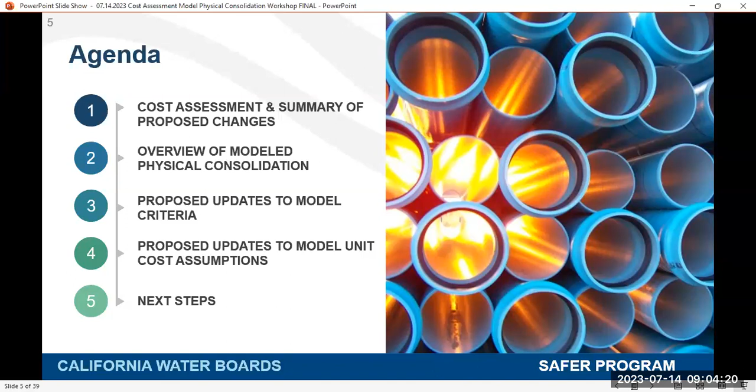So my name is Kristen Appold. I am the senior for our needs analysis unit within the Division of Drinking Water. I'm going to be providing the cost assessment background information for you today, and then I'm going to turn things over to Moj on our team, who's going to really dig in on the physical consolidation analysis and the changes we're looking to implement.

But before we get started, we always like to start our webinars with a quick poll question to get a sense of... let me restart the poll, relaunch poll, see, there we go. We like to get a sense of who's with us today, how familiar you are with the topic we're discussing. We're going to be covering a component of our cost assessment model, which is embedded in our broader needs assessment work that we do every year.

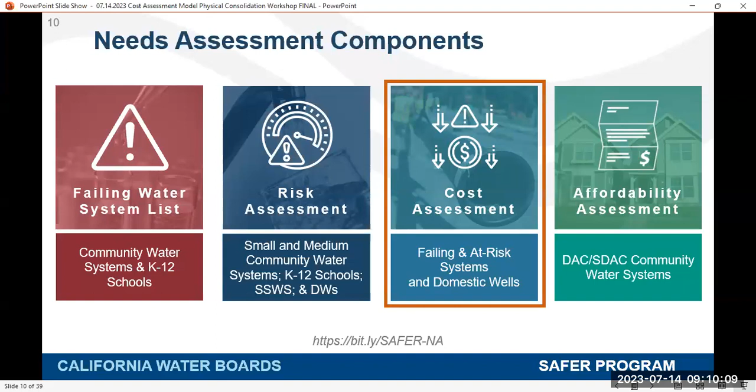Today we're really focused on our cost assessment work and the underlying assumptions within that model. Senate Bill 200 directs the Water Board to estimate our anticipated funding needs related to implementing interim emergency measures and long-term solutions. It's supposed to inform how we prioritize our SAFER funding, give us a sense of how much funding is needed compared to how much we have available so we can make smart decisions around how that money is spent, and communicate to others the extent of the challenges we're facing across the state.

I want to emphasize, and you'll hear us repeat this, the cost assessment model, the analysis done, and the cost numbers that come out of it are not intended to inform local decisions. This is not an options analysis, and it's not used in any way when we work with communities to inform local decision making. Because this is a model, we're doing a big cost estimate using available data that is very limited, so we have a lot of embedded assumptions and estimates in the model, which should not be used to base local decisions. We do not use it at the local level for any decision making or work with water systems.

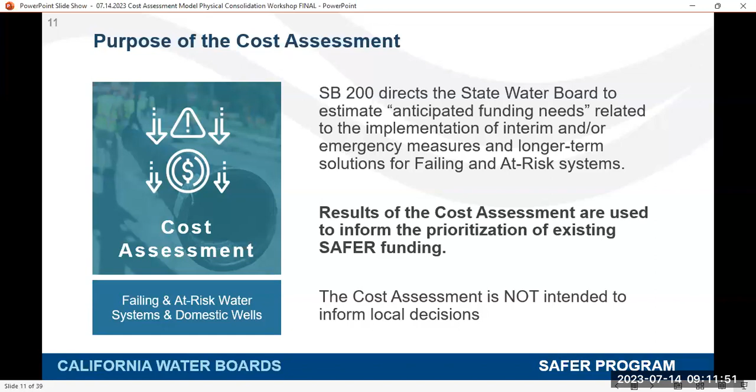Okay, so who's included in the cost assessment? I covered this a little bit earlier, but it's worth highlighting. So we are looking at trying to identify modeled interim and long-term solutions for failing water systems.

You'll see here we assess failing water systems for a number of different criteria, highlighted in the green text. When we first did our model in 2021, the very first iteration of it, the criteria for failing was smaller than what it is today. So there's a lot of discrepancies between our inventory of systems that we used back in 2021 versus where we're headed in the future.

So our new failing list of public water systems includes failing systems for E. coli violations, treatment technique violations, and repeated monitoring reporting violations. These are things that we need to accommodate in the newly designed model.

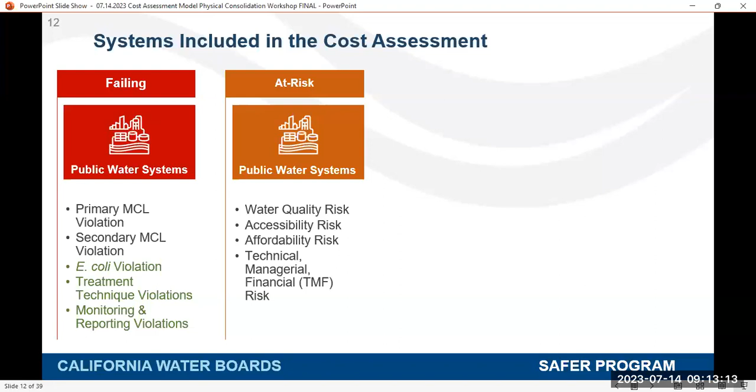Our at-risk public water systems are included in our analysis, and we identify at-risk systems in our risk assessment, looking at water quality risk, accessibility risk, affordability, and technical managerial financial capacity risk. If you're interested in learning more about how we identify our at-risk public water systems, please go to our webpage. We have lots of documentation, webinars, PowerPoints on how we got there. It's a process that evolves over time as data becomes available.

We then identify at-risk state small water systems and domestic wells. Again, there's been quite a bit of change in how we identify our at-risk state smalls and domestic wells from the first iteration of our cost assessment model, done back in 2021. At that time, our at-risk systems were only looking at water quality risk, and that was it.

And actually what I've noticed here is we're missing our whole new category. We've added in the past 2 years both drought risk and socioeconomic risk. So our at-risk state smalls and domestic wells, that inventory of systems we're looking at, has changed quite a bit from what we had in 2021 to where we are now. Because we've added additional risk categories like drought and socioeconomic risk to help us really identify that more narrow list of communities that may be at risk, we've got a smaller subset of systems within this category.

You'll see that throughout the slides as we look at a comparison between the 2021 model and what we're recommending here.

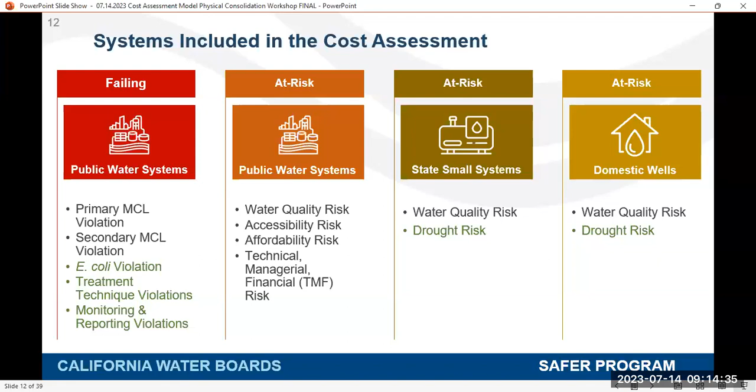So let's talk about the proposed changes to the entire model. We have been hosting lots of workshops on this. If you're not as familiar with this work and you want to understand the history and how things have evolved over time, please take a look at our webpage. Again, lots of documentation there with white papers, webinars, PowerPoints on how the cost model has evolved.

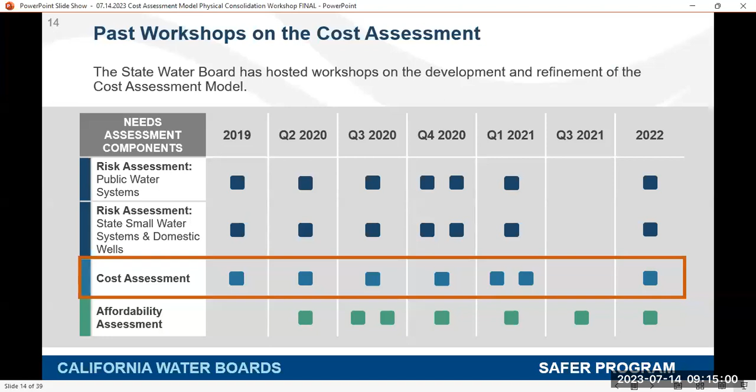And if you're not familiar with the webpage, we're providing the hyperlinks. So let's talk about how the old model used to function, because we are proposing to streamline it to make it a little bit simpler and easier to follow and to operate.

So the 2021 cost model, which again was developed back in 2019 and 2020 with our colleagues over at UCLA and Corona Environmental and a bunch of other subcontractors. The first step of the old model was to look at many types of long-term solutions all at the same time. So we would model everything out, different options, in the first step.

And then we would conduct a sustainability and resiliency assessment that was looking at a few resiliency metrics and cost numbers, to compare the top 2 modeled solutions. And then we would select the best solution, taking into consideration that scoring and the cost estimate number.

Unfortunately, with this model, it was a good first step. However, we saw in the results that it tended to over-select point of entry, point of use devices over treatment for failing systems, especially where we think the agency would not really want to do that in the long run. So we wanted to rejigger the model to make sure that the results better aligned with the priorities of the SAFER program and at the State Water Board, and with reality and where we were seeing our SAFER projects and funding being allocated over the last few years.

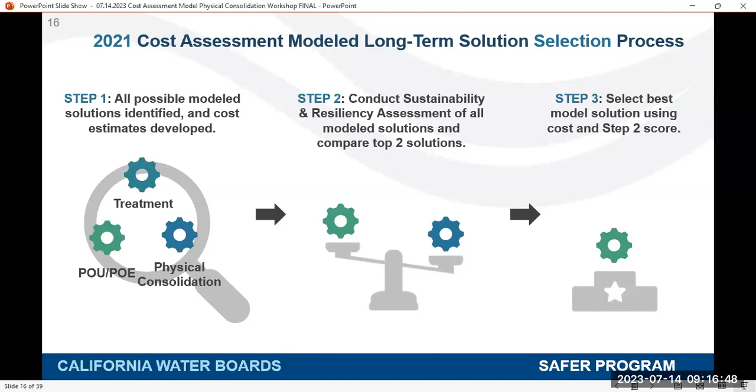So we wanted to rethink the model, and this was our proposed new process that we put out last year in a public workshop for feedback. And this is the newer process with a slight change.

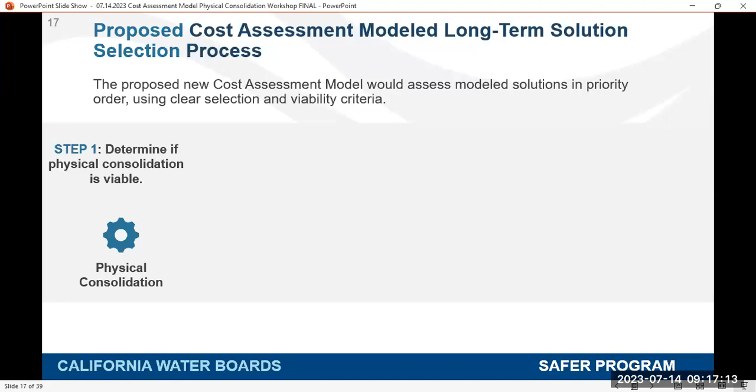So step 1 is to actually look at physical consolidation as the first step in the model. This aligns a lot more closely with the program priorities and the State Water Board priorities around failing and at-risk water systems. If physical consolidation is not a viable solution within the model, we'll then look at whether or not treatment may be viable for our systems that are failing for water quality issues.

If treatment may not be an option, or if the size of that system indicates centralized treatment may not be a solution, the model will then look at point of use, point of entry. But in those cases there may be some systems where that's not viable, and we circle back to identify small scale treatment with O&M assistance for really small systems. We used to have bottled water or hauled water in here from last year, but we don't see that as a viable long-term solution, so that's been modified.

We'll be going over the last three steps in future webinars. Today we're really focused on how the model looks at physical consolidation.

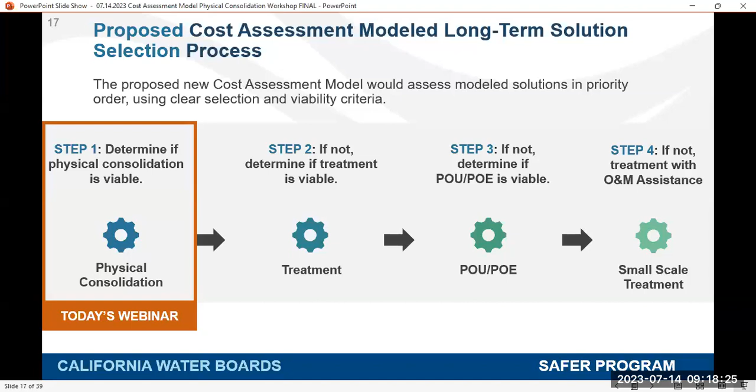But we wanted to get your quick feedback on what the changes are that we're recommending for the big picture model's process. Let us know what you think.

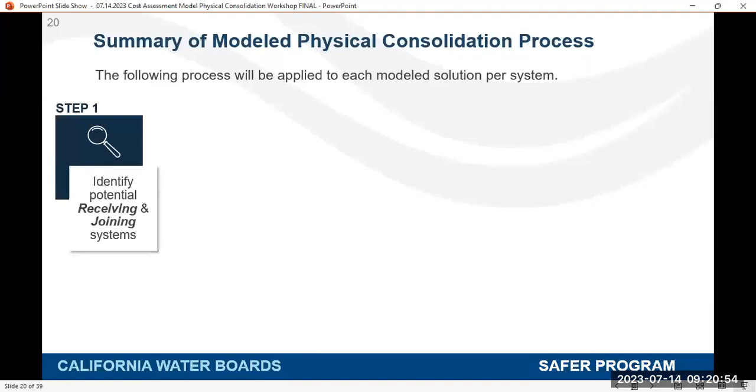In step number 1, we try to identify our potential list of joining and receiving systems. If any of the systems don't meet the criteria we're recommending, then physical consolidation is not considered viable, and we look for alternative long-term solutions.

For the systems that meet the criteria, we take them to the GIS analysis, where we apply distance criteria. Then again, for any systems that don't meet the distance criteria, physical consolidation is not considered viable, and we seek alternative long-term solutions.

For the systems that meet the distance criteria, we export our GIS analysis spreadsheet and start applying all cost assumptions, equations, and multipliers to come up with the capital cost for each consolidation project.

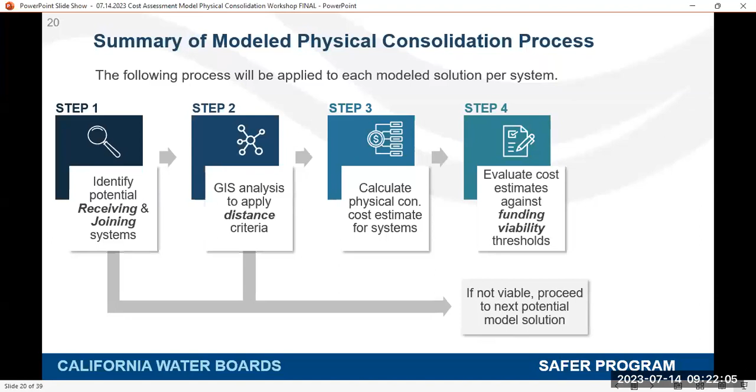From there, we take each physical consolidation capital cost and evaluate the funding viability threshold by comparing it against our recommended model funding viabilities. If the project cost for the consolidation exceeds the viability, then physical consolidation is again not considered viable, and we seek alternative long-term solutions.

For the projects that meet the funding viability thresholds, we go to step number 5. There, for any system that meets both the distance criteria and the funding viability threshold, we cost out additional infrastructure needs. For example, if our receiving system is failing for water quality, we cost out additional treatment. If the receiving system has a sole source of water supply, we look at costing out a new source, and we add other essential infrastructure costs to increase the system's sustainability. All of that happens in step number 5.

Before I dive into the details of each step, I'd like to emphasize that through our internal work group, consisting of our Division of Drinking Water and our Division of Financial Assistance, we tried different physical consolidation options using different system size criteria and funding viability thresholds for both joining and receiving systems. Any number you see on the coming slides is based on our recommendations, but if you have questions about how we developed or reached these conclusions, I encourage you to visit our appendix.

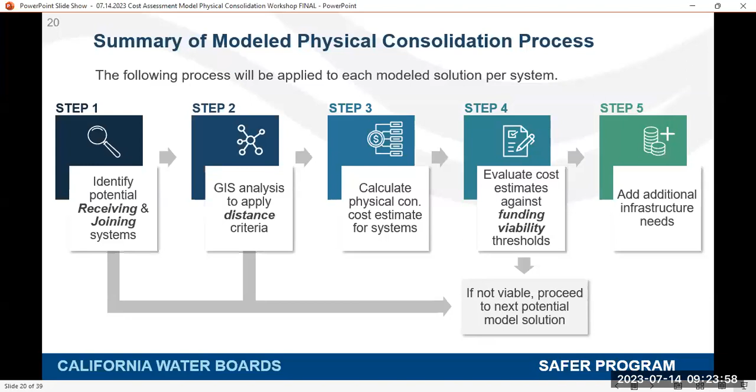So next slide, please. Okay, so first and foremost, we would like to identify who's receiving and who's joining systems. But before we do that, I would like to briefly define what's a receiving and what's a joining system.

So basically, a receiving system, if you want to think about it, is our large community water system that subsumes and expands to provide water supply not only to their customers, but to the joining customers as well.

Joining systems, though, are usually smaller public water systems, state smalls, domestic wells, that dissolve within the boundaries of the receiving system. So they no longer exist, and they start receiving water from the receiving systems.

Next slide, please. Okay, so now we've defined who's joining and who's receiving. I would like to walk you through our criteria for the selection.

The old criteria excluded completely any failing or at-risk public water system from being a potential receiving system, and only looked at non-failing or non-at-risk systems with a population greater than 3,300 as a potential receiving system.

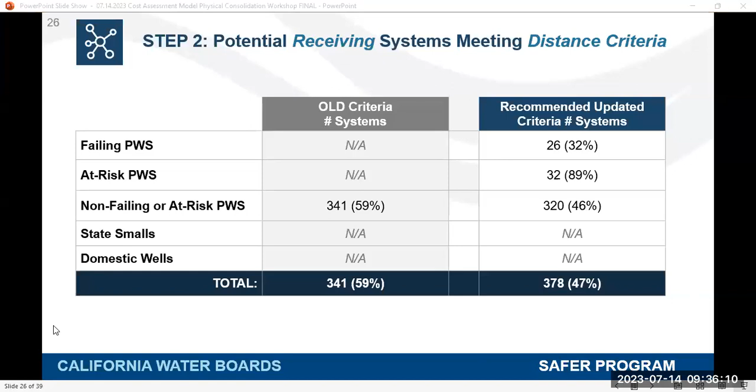Next slide, please. So for joining systems, our recommended criteria includes more failing and at-risk public water systems. We have 173 potential joining systems compared to 138, and we have 250 at-risk public water systems compared to 193—roughly 100 systems more following our recommended updated criteria.

State small and domestic well counts again are low, and I keep emphasizing this because we are utilizing a different inventory. The old criteria relies on wells and state smalls that are at risk of water quality, while the state smalls and domestic wells we utilize for the recommended updates are based on the combined criteria. So this will bring our counts lower.

So in total, we're looking at 26,175 potential joining systems compared to 35,619 potential joining systems following the old criteria.

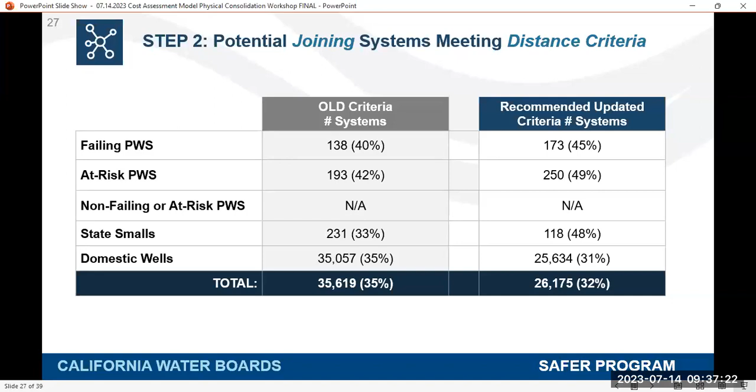So now we identified the receiving and joining systems that meet the distance criteria. We would export these to Excel, and we start conducting all the cost assumptions and cost equations in there. The State Water Board actually conducted rigorous research.

We did a lot of back and forth, and we tried to collect the most up-to-date prices by contacting consultants, vendors, engineering firms, also auditing and reviewing State Water Board funded projects, and outreaching to small and medium-sized water systems. If you have any information or want to see how we came to the conclusion of each cost estimate, I would really encourage you to visit Appendix B in the white paper.

Thanks, Moj. I just want to respond to a question coming from the inbox. Someone says they don't quite understand what we mean by state smalls and domestic wells as potential joining systems. These are communities served by state smalls and domestic wells that are designated as at risk right now in our risk assessment, and they are potentially joining in that they're at risk.

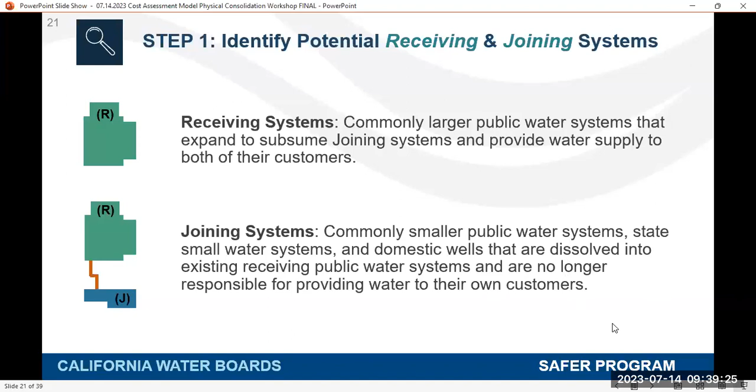So we would want to see if we could join them with another community water system. For example, if a domestic well was joined to a potential community water system, it would mean they're no longer relying on their domestic well for water. They would have a pipe connecting them to a community water system, centralized treatment, and they'd get their water that way. This is all hypothetical since it's a model. But that's what we mean by domestic wells and state smalls that would be joining systems. If that didn't quite answer your question, please feel free to raise your hand or provide another question.

And then, what is the maximum population served by a state small? I don't have the population number off the top of my head, but I know it's 15 service connections or less, so very small. Again, state small water systems are not regulated by the State Water Board—they are regulated by counties.

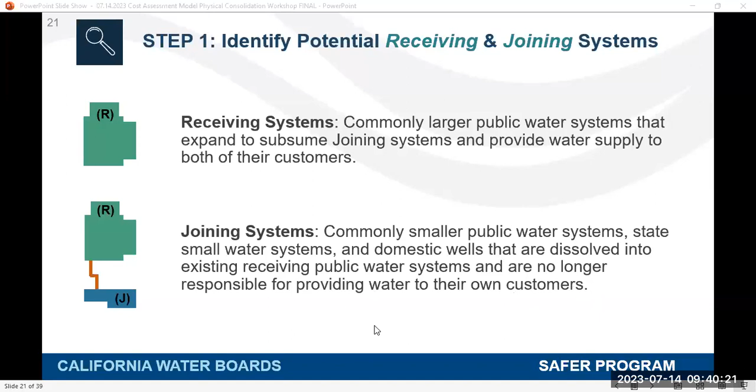Yes, sorry, thanks. I just had a couple questions about step 1 and step 2, I guess, for domestic wells and state smalls. One is, just seeing that the number of potential joining systems and systems included has decreased a lot for domestic wells and state smalls, and it seems like a lot of that's due to the reliance on this combined risk criteria. From our understanding of the needs assessment, that combined risk criteria is set up so that even if you're at high risk for water quality, you might not have combined risk. So you could have really bad water quality, but you still wouldn't be included in the cost assessment—or I mean, you wouldn't know it was really bad, but you'd be at high risk. I'm wondering, I guess we can look at the details in the white paper, but what was the thought process behind relying more on the combined risk than looking at either water quality or drought risk separately?

So it's a good point. For us, it aligns more with the direction and public feedback we received on how we conduct risk assessment for state smalls and domestic wells. There was feedback from both our advisory group and the public that we try to identify at-risk state smalls and domestic wells using a similar method, or at least similar data point categories, as we do for public water systems. That's why we added drought risk and socioeconomic risk. That gives us a smaller at-risk pool, but they are, in our mind, the top high priority at-risk communities. Because for water quality risk, we don't have an essential failing list equivalent for state smalls and domestic wells, since we don't have good data sets for that, we want to be a little conservative around how we incorporate at-risk state smalls and domestic wells into the model. The numbers aren't too far off, except for state smalls for sure. But that aligns with how we've evolved our at-risk methodology for state smalls and domestic wells. Hopefully that makes sense, Eric.

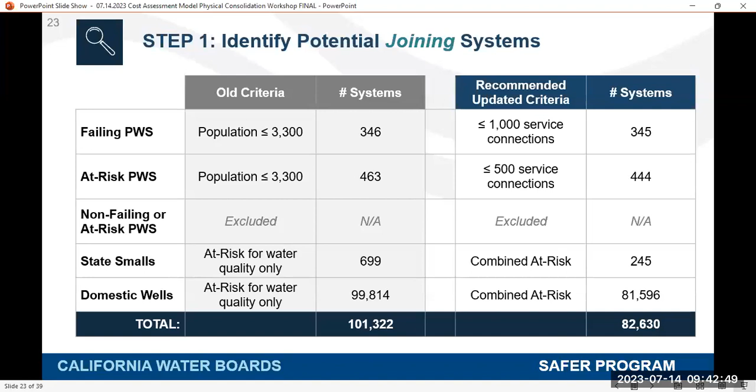I had one other quick question on step 2, just to understand how the recommended updated criteria for distance works for domestic wells. It sounds like if the route intersects, so if it's along a modeled route, then it would be picked up. And the quarter mile for maximum route distance, is that regardless of whether there's going to be a consolidation between two public water systems? Correct. Any at-risk domestic well within a quarter mile of a potential receiving system would then be included based on that quarter mile distance? Yes, and that is new to the model. That was not included in the first one.

Okay, great, thank you. Yeah, and we lowered the distance criteria just a little bit from what it was in the first model, based on observations of consolidations and pickups we'd seen through existing consolidation efforts. We thought it was best to lower it a little bit to align with the reality we're seeing. Okay, thanks a lot. Yep.

All right, one last question from Susan: what problem or gap with the old model is the new model focused on addressing or solving?

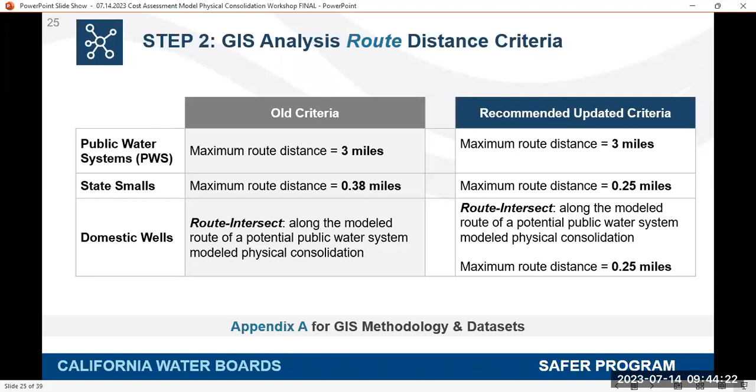So Susan, the old model had pretty strict criteria around physical consolidation. In reality, for example, let's go back to potential receiving and joining systems -- the old model was saying that failing systems and at-risk systems could not be receiving systems. But in reality, with physical consolidation projects that the State Water Board is actually funding, we are funding projects where an at-risk or failing water system can be a receiving system, and we fund not only the consolidation of nearby systems but treatment and long-term infrastructure to bring that system back into compliance. So we felt this criteria was too restrictive and didn't match reality, and we wanted to expand it to align with the direction the water board had taken.

For us, it was really about making sure the model reflected current projects and funding practices around physical consolidation. We also wanted to make sure the cost numbers, which we're about to go into, were updated to reflect the cost increases we've been seeing across the state, inflation, et cetera. So it's about developing a more robust, more accurate cost estimate so we can make better decisions around our funding. Hopefully that helps answer some of your questions, Susan.

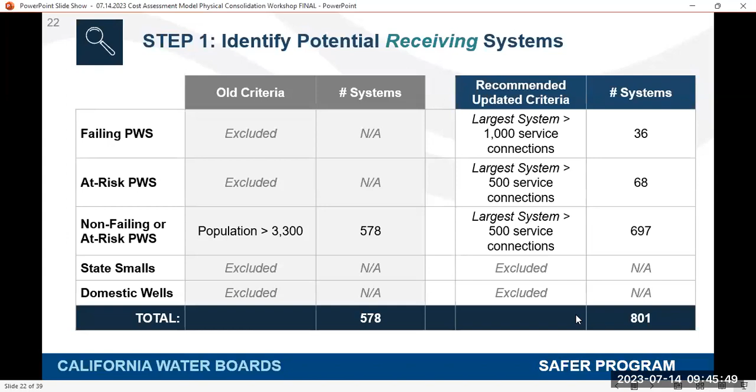All right, I don't see any other hands up or questions. Let's get into step 3.

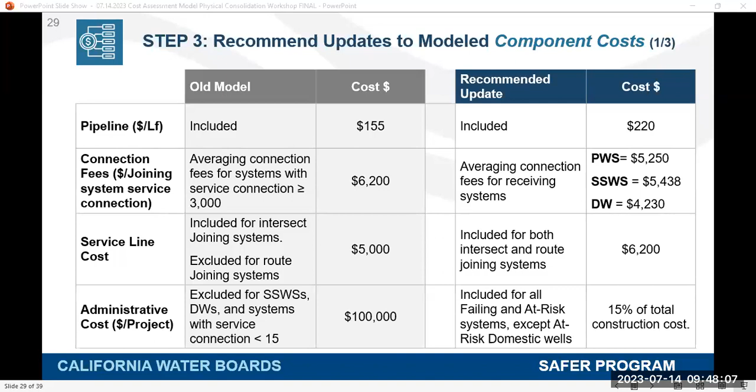CEQA cost, similar to the admin cost in the old model, was excluded for any system less than 15 connections, state smalls, or domestic wells, and it was a lump sum value of 85,000.

Based on our outreach, we recommend adding the CEQA costs to all failing and at-risk public water systems, only excluding domestic wells. The CEQA costs differentiate whether it's an intersect or a route system. For intersect systems, CEQA will be applied as a lump sum of 25,000. For route systems, it's a lump sum of 100,000.

This is based on the idea that if the two systems are adjacent, there's less disruption to the environment and probably less mitigation measures needed, so subsequently less CEQA associated costs. That's how we came to that conclusion, and everything is documented in the appendix of the white paper. I really encourage you to go there and read all the detailed information if you have questions.

For contingency, we're keeping it at 20% unchanged, but we are excluding the 20% contingency from domestic wells. Our proposed updated model recommends adding a 3% inflation that was not included in the old model, and also adding 10% for planning and construction that also was not included in the previous model.

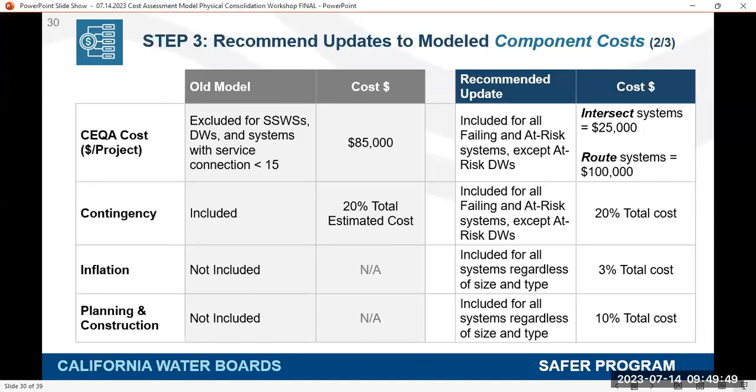Also, we are proposing to add a regional multiplier. It was not included in the physical consolidation in the old model.

The regional multiplier adjusts the pipeline and service line costs depending on the receiving system's county. For a rural county, we don't have to worry about it, but for urban counties we will increase the cost by 32%, and for suburban counties we'll increase the cost by 30%.

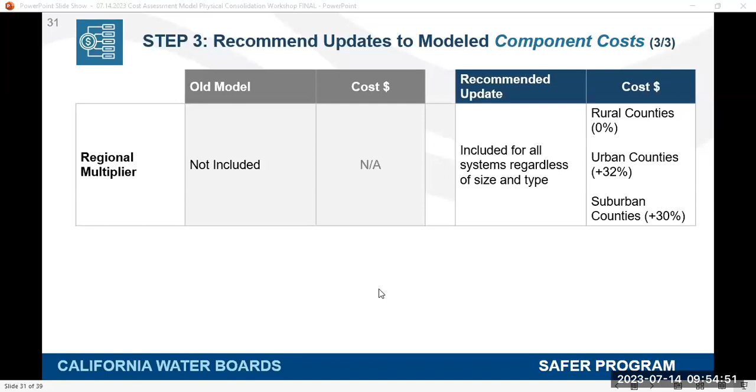Okay, no more questions? Should I dive in? Go for it, go for it.

Step number 4: we would be evaluating the physical consolidation funding viability thresholds. So the old model developed followed funding viability thresholds for public water systems. The old model utilized a total capital cost less than $500,000 and a cost per connection less than $60,000. These two numbers were outlined in the intended use plan from 2020-2021.

So those numbers went up. In 2022-2023, the cost per connection increased from $60,000 to $80,000, and the capital cost increased from 500,000 to 6 million. In consultation with our Division of Financial Assistance, they recommended inflating the funding thresholds that appeared in the IUP by 20% to account for any inherent limitations in costing out or modeling physical consolidation. So after applying that 20% adjustment, the cost per connection would be 96,000, and the total capital cost is 7.2 million.

For state smalls and domestic wells: for state smalls, our recommended model recommends a maximum of 2 million as a capital cost, and for domestic wells, we have a maximum of 150,000. I really want to emphasize that the funding viability thresholds for state smalls and domestic wells are not included in the intended use plan or the fund expenditure plan. They were developed based on consultation with our Division of Financial Assistance, based on observing physical consolidation projects in the states. The funding viability thresholds you see here on the table are for the cost model purposes only.

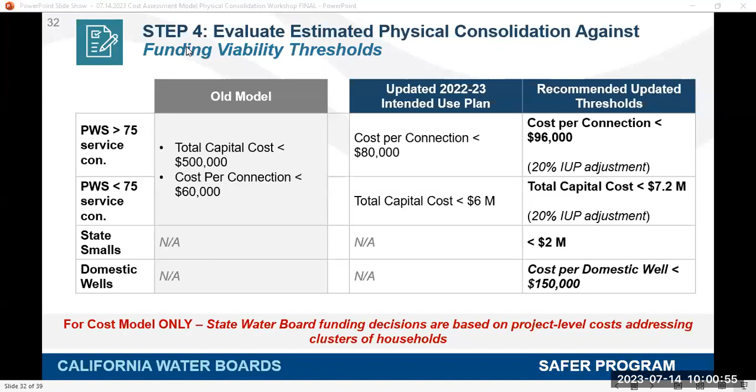Applying the funding viability thresholds I shared earlier, and comparing against the capital costs for each physical consolidation project, we came up with counts of systems that would meet the funding viability thresholds. The table here shows the estimated physical consolidation costs broken down by system type, comparing the old and recommended criteria. In general, our updated cost model estimates a higher count of failing and at-risk public water systems meeting the funding viability threshold.

We have 169 failing public water systems and 248 at-risk public water systems. The cost using the updated assumptions is higher because we have higher counts of systems, including more at-risk and failing systems. For failing public water systems, we have $550 million compared to $407 million using the old model. For at-risk, we have $900 million compared to $727 million using the old model.

State small counts and domestic well counts and costs were lower using our recommended updates, and I keep saying this, but it's because of the inventory change. For state smalls, we have 118 that meet the distance criteria and funding viability threshold, which was a maximum of $2 million, compared to 231 state smalls using the old model. So our cost came to $78 million compared to $103 million.

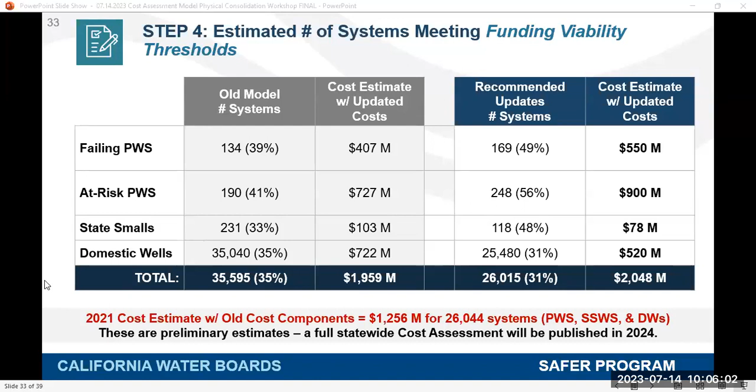So Moj, step 5. Finally, step number 5. For the systems that would meet the funding viability threshold, those are the systems where physical consolidation is viable, then we would move to step 5.

In step 5, we start to add any additional infrastructure or admin needs to increase the sustainability of the systems.

In our recommended model, we are proposing to add treatment costs for failing systems, for example, systems that are failing water quality standards.

In that way, we would be looking at a failing analyte, and then we would be costing out the best available technique, both capital and O&M costs, to remediate the issue.

Our updated model also proposes to add a cost for an additional source. If the receiving system has a single source of water supply, the additional source can be another well, if the sole source was a well.

Or it can be an intertie source, depending on the current sole source that the receiving system has.

Both the old model and the recommended model include and recommend adding other essential infrastructure. However, the old model included the OEI, how we abbreviate other essential infrastructure, based on a statewide percentage and assumptions.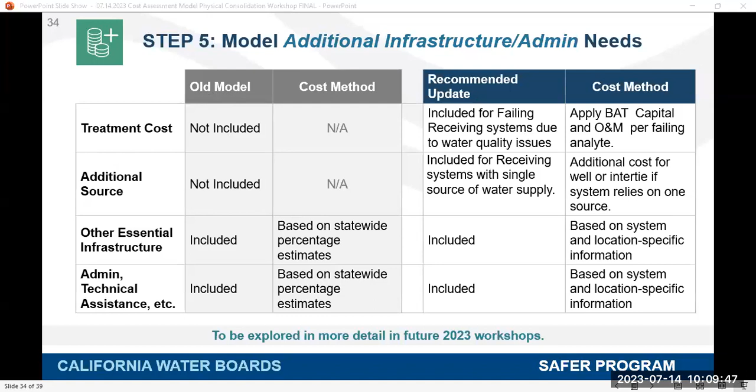All right, so we're going to get into some of our discussion questions, trying to assess what your recommendations might be. If you aren't quite sure yet how you might want to answer these questions, you can always email us after this webinar.

After you've had some time to think about it and perhaps read through the white paper, we're looking for general feedback in terms of whether you agree with the proposed methodology for physical consolidation in the model.

We tried to be super transparent about how the model works and the steps in getting water systems through that model. Do you have any suggestions or feedback on the updates to our cost component assumptions? Those are all the cost numbers that we showed you.

If you take a look, I know Moj said it, I've said it, if you take a look at Appendix B, we do include very detailed explanations on how we got to those updated cost assumptions.

We did look at projects that we have funded here at the State Water Board. We've contacted vendors and consulting firms, and we've also even talked to a few water systems.

Trying to get their feedback and recommendations on what these numbers should be updated to. But if you disagree, please let us know, or if you feel like we're missing something, like Jennifer mentioning the CPUC fees, we'd love to hear from you.

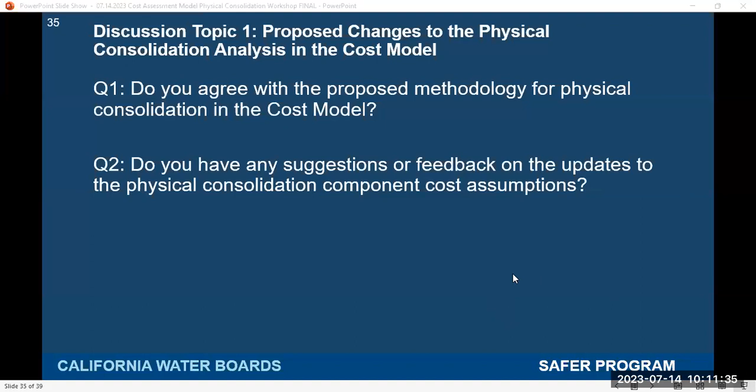There were some specific cost numbers that we were thinking about but didn't include in this analysis, and we wanted to see if anyone had strong feelings about this.

We were wondering if our model should include an elevation difference cost adjustment. This would account for perhaps additional costs related to pumping that would obviously drive costs up a little bit, but we could potentially include this with the GIS analysis and cost this out as part of the model.

Moj, did you have anything else to add on that? So I think if we went with the elevation difference, as we internally discussed in the work group, we would be adjusting the cost by 5%. So it would be a definite increase if we went with that direction, but we'd just like to get the public's feedback on whether we need to apply it or not.

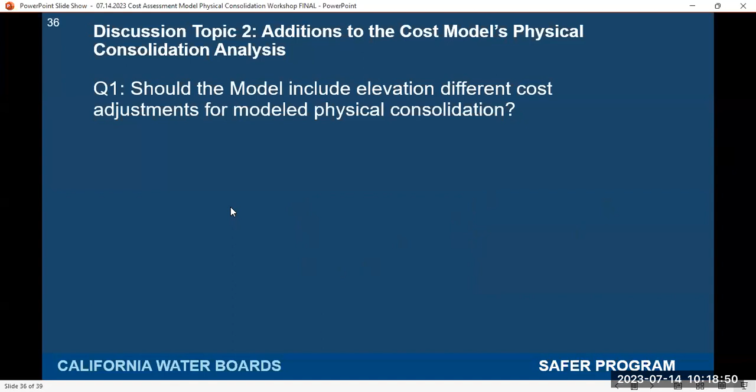Okay, I don't see any other questions or hands raised, but if folks have some, you can chime in. We're not quite finished yet.